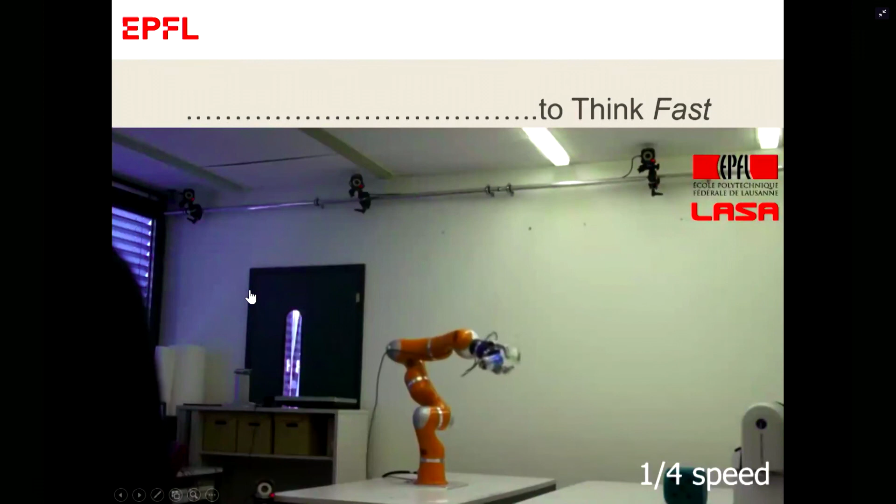So as I said in introduction, what I really wanted to talk about is the type of work that we do on learning controllers that can act fast. And I always like to start with this example that maybe some of you know, where we have a robot that can catch objects in flight very, very rapidly. And so it's not so much the speed at which the robot moves, because if you pay careful attention, you'll see that the robot doesn't move that fast. It's the object that moves super fast. But what the robot has to do real quick is to adapt to the motion of the object.

And what is particularly difficult when you want to catch an object like this one is that you have to orient correctly to be aligned with the particular direction in which you want to catch the object. So here, you want to catch the bottle, so you have to align with the main axis of the bottle. And it becomes even more challenging when you want to catch this type of object, which are half-filled with liquid, because in this case, the issue is that you have a moment of inertia which is not constant.

As the bottle flies, the liquid is going to move slightly, and so it's going to imbalance the object, and so the dynamics is very difficult to predict. And it was already difficult before, but it's even more difficult here, and it will very much depend on how you throw the object in the first place. So in order to manage to catch objects like this, you basically really need to have control systems that are very adaptive, fundamentally adaptive, and they can adapt in milliseconds.

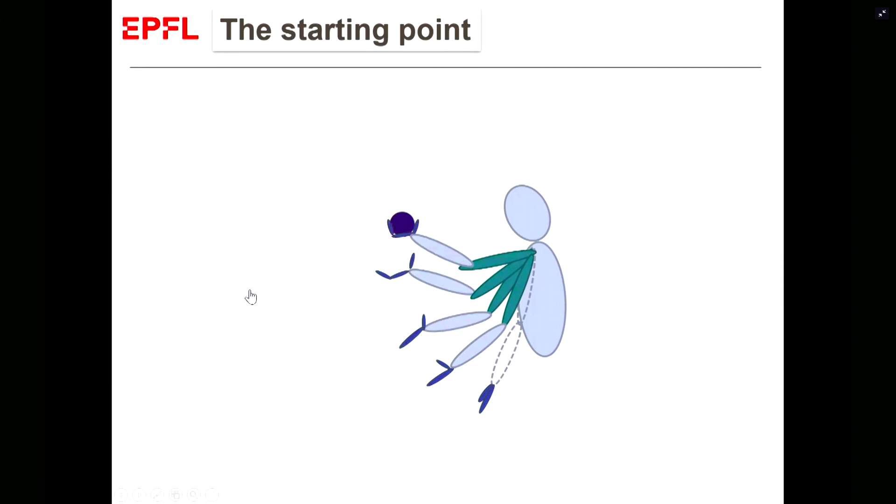So in order to explain how we get to that, I will start with the simplest example of all, which is just to put your hand on a ball. So imagine you have a robot that starts from a position A, and you want to put the robot's hand onto that object. So you're going to move the hand and eventually close on the object. And you have to compute a path. And you say, well, I can compute paths, but there are multiple of them. There are actually an infinite number of those paths. So which one should I choose has been a problem in robotics for decades, and we have many solutions. It totally depends on the objective function you choose.

You start from another initial condition, you have to solve again for this path, and again, you can use multiple ways of doing this, but each time you need to have an objective function and solve for that. So as opposed to solve with an objective function, send that to a solver and then wait until you get a solution, which may be quick or not, depending on the solver and the number of constraints, the ideal, what you'd like to have, is a closed form solution. By closed form, that means you have an analytical solution. Once you have an analytical solution, you don't have to plan anymore.

And if this analytical solution has some particular properties as the ones that are drawn here, such that it generates a flow of motion. They are illustrated here. Each of the gray lines represents a trajectory in state space. If you have a closed form representation of all those trajectories, then you just have to query your function to know how to move with it, and you can query it at each time step. And the best way to represent this is with what are called dynamical systems. And these are differential equations.

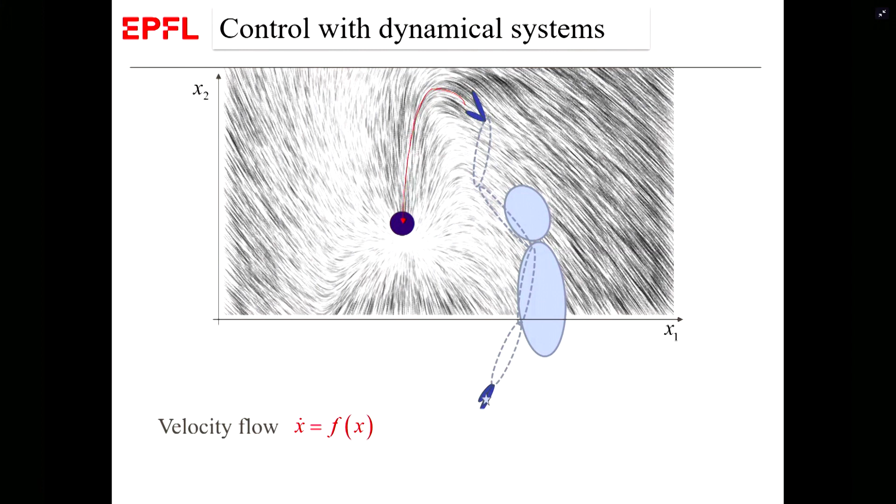Here I show a first order differential one. We often work with first order or second order. Here is velocity control, but you can also do it in acceleration. It's the exact same principle. So imagine that you have such a function. Here it is going to be f of x. This generates a set of velocity flows. And if your velocity flows are such that they are stable at where you want to go, then you are ensured that all the paths will eventually lead you to that object.

Now, you'll tell, okay, all of this is a static motion, so it's very easy, but what happens if the target moves, as I showed before? And there is a little trick that you can do with such a mathematical representation, is to say, look, I'm going to place the origin of my system onto the ball. And if I do that, then that means that as soon as the object moves, then my entire field moves with it. But if the field moves with it, that's fine, because that means that at every single position in state space, you still have one single trajectory feasible that brings you to the object.

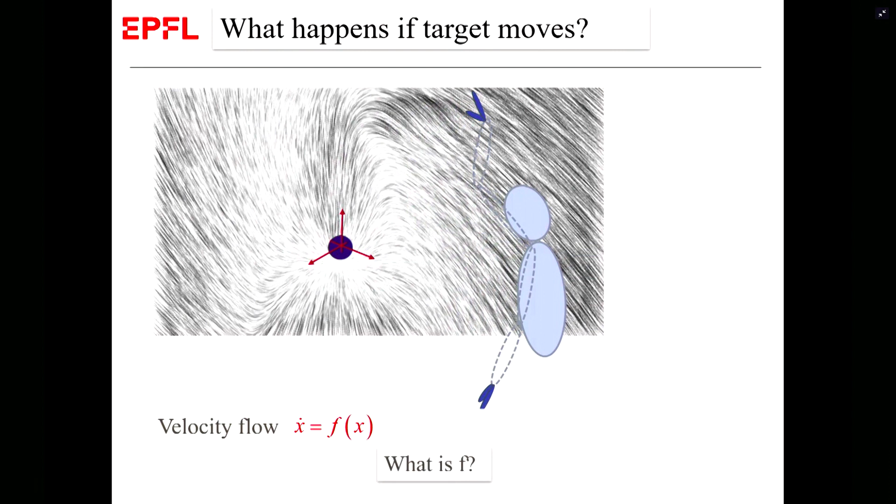And this is in closed form, so you just have to compute f of x at each time step, and it's not even time dependent. And so that gives you an enormous advantage because you don't have to plan, and you are guaranteed to have a feasible solution. Now the big question is, what is f? How can I infer f? There are many ways in which we can do that.

At the beginning, we used human demonstration, so we had a human showing to the robot how to do tasks, how to pick up objects. These will give you trajectories, examples of feasible trajectory. More recently, what we've done was to rather generate this trajectory with optimal control, solving for more complex constraints offline, and generate feasible path in space. Once we have that, then we can learn a function, and we can learn this in closed form.

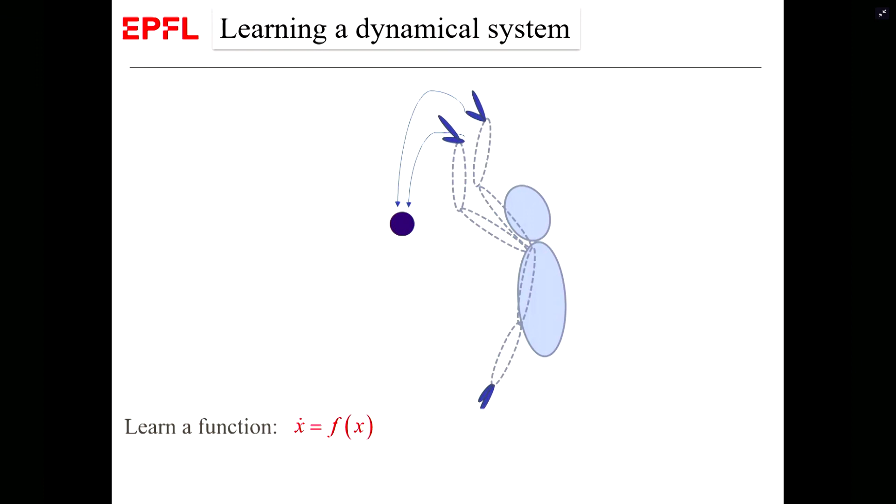So those of you who are familiar with machine learning, you know that there are many techniques that can learn that. It's actually a regression problem. So you want to predict the velocity, which in the particular drawing here will be two-dimensional, but if you're controlling for the hand of a robot, it will be at least three-dimensional, or maybe six, and if you're controlling for all the joints, it may be higher dimensional. But each of those dimensions, each of the velocity, can be estimated through regression.

Well, what you can do is say, okay, I want to explicitly have a convergence to a fixed point, which we can express as saying, okay, there is a point in space for which I want my function to vanish. And now the question is, how can I change the algorithm to learn with support vector machine or with neural networks so that I will stabilize at that point? That means you want to embed stability constraints inside the optimization of the machine learning technique. So to do that, you have to express constraints.

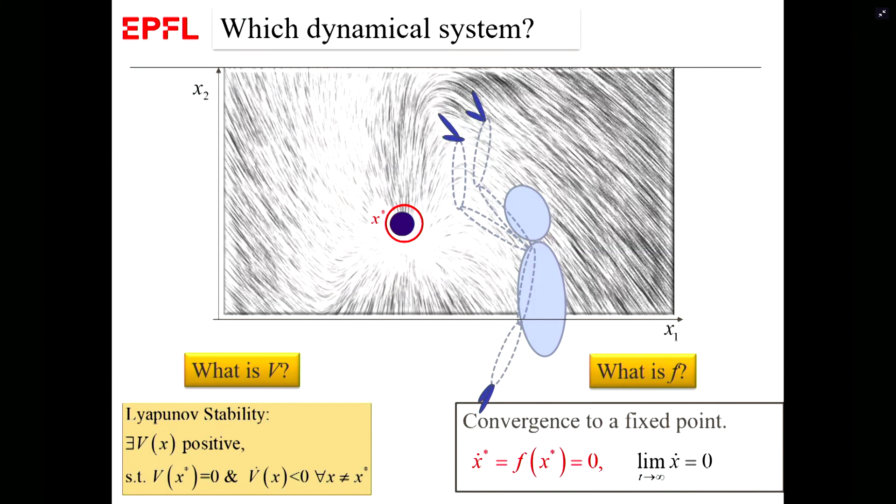And so in practice, we've looked at many different ways in which we can address that. I will not go through all of them. I'll just give a glimpse of two of them. So one very first approach that we took was to say, if we observe one particular approach in machine learning to represent such a problem, which is through a probabilistic model where you learn a full density between the distribution of velocity and the distribution of state, when I'm looking for a model like this, what I end up with is a set of Gauss functions, which we see here overlaid, and so it's a slice on each of those Gauss functions, and we have a mixture of those.

If we want to predict the velocity from this mixture, we can do it in closed form. We can take the expectation over the conditional of this full density, conditioning the velocity on the state. And we get a linear combination. So observe, first of all, that it's linear, which is nice. And it's a linear combination of linear systems.

The AK X plus BK: X is the state, AK are a set of matrices, BK are a set of vectors. This is very easy to compute. And the HK functions are actually just normalization functions between 0 and 1. So this is a closed form solution, and it has open parameters that are linear.

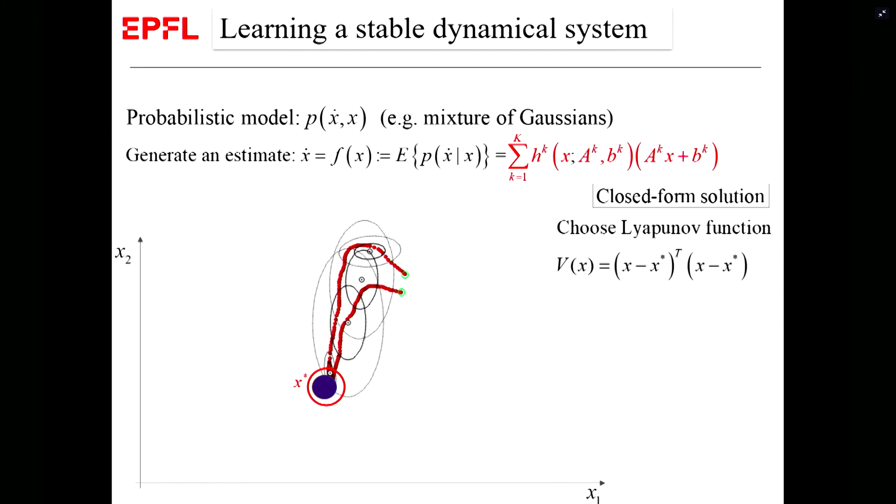Now you can set constraints to force stability, and you can derive them here by choosing the simplest Lyapunov function ever, which is a quadratic cost to the point that you want to reach. And you can infer then constraints on these open parameters, the BK and the AK. And you can enforce that basically the energy decreases.

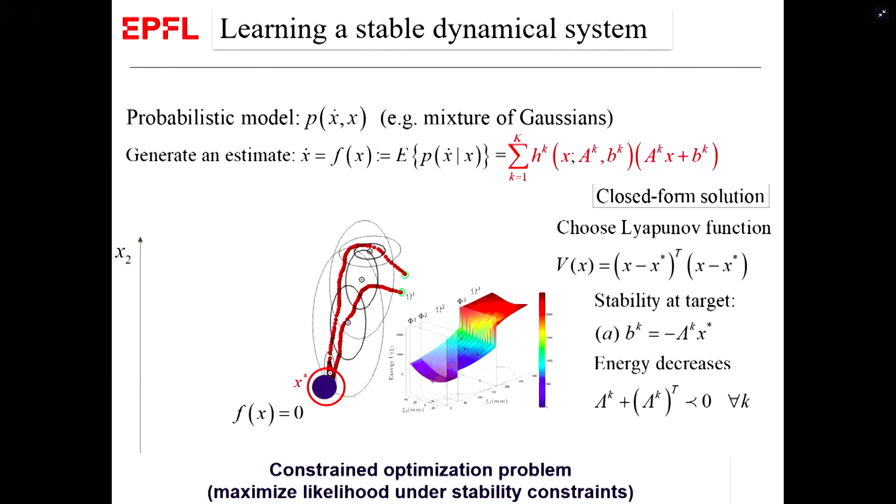So you can write this, and you go back now to the optimization for this particular model, which is a mixture of Gaussians. It's a constrained optimization problem where you maximize the likelihood or you minimize the mean square error under now a certain number of constraints, among which the stability constraint. You do that, then you get exactly what you want.

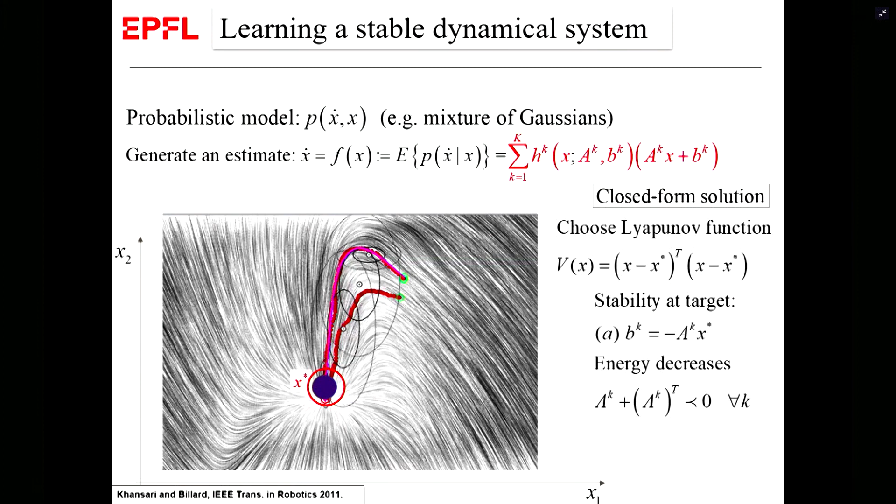You get a flow, observe here, you get a flow as we've seen before. You have a very tight match to the actual demonstration, but you also have a guarantee that you stop. And observe also that there is a nice generalization at the bottom where the system generalizes to converge to that position. Now, this was one approach.

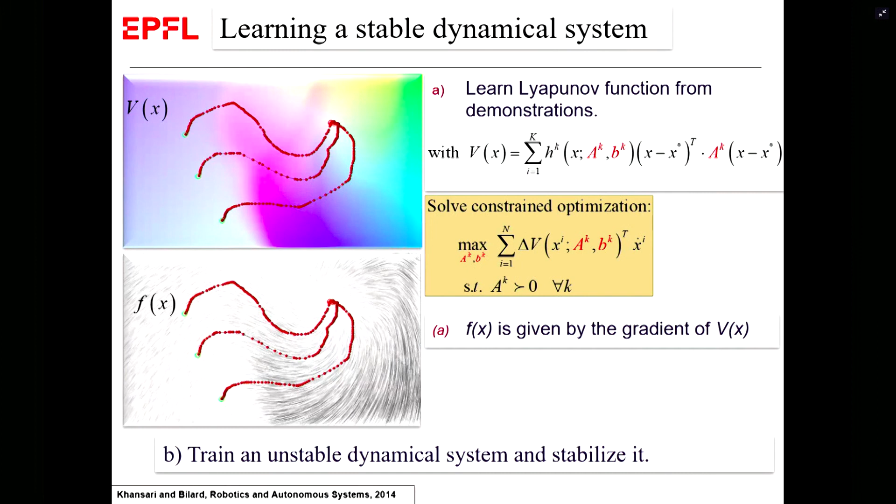We then looked at other approaches where we relaxed the fact that we're using such a conservative Lyapunov function. We looked at non-conservative functions, where we directly learn the Lyapunov function and then derive f from the gradient of V. We also showed that we could train unstable dynamical systems, learned, for instance, from neural networks or any other approach, and then stabilize them with this approach. And if we don't have demonstrations, we can also do it with reinforcement learning, which we have shown in this particular paper. I will not go into detail.

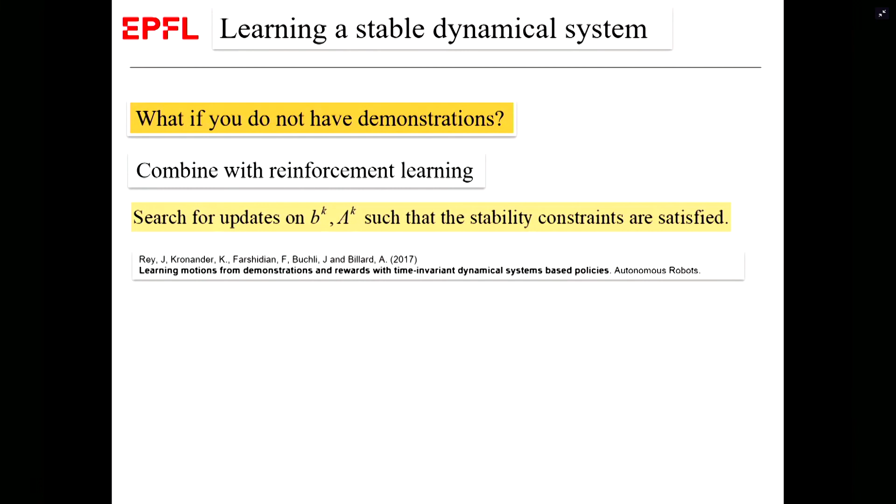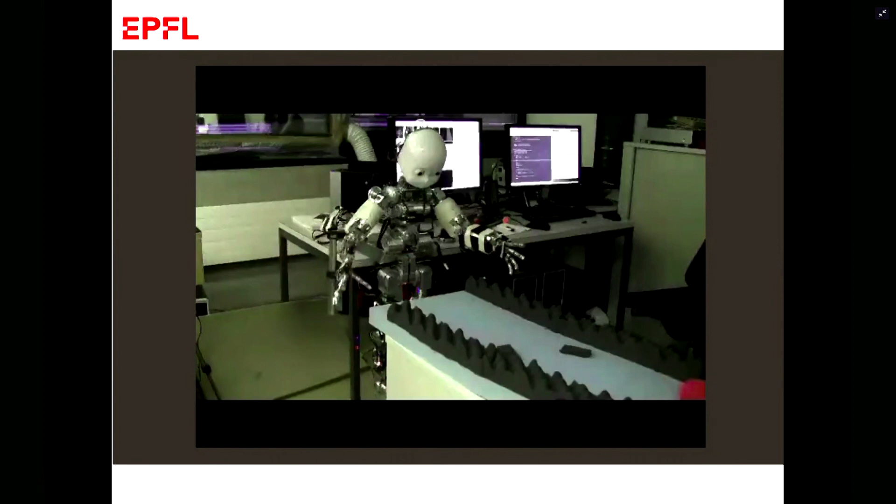So once you have such a system, here is a little demo of what you can do. If you have a ball and you want to reach it, and you know that you will converge to it, even if you generate disturbances on the way as the ball goes down that slope, you will be able to catch it. So you'll see that we're going to generate disturbances. We're either going to lift the slope as it goes, or we've placed obstacles on the way,

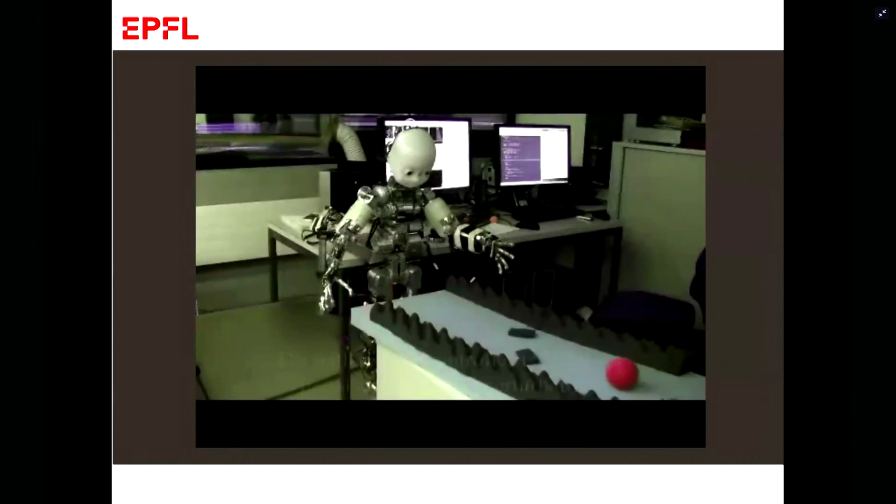and this generates really unexpected disturbances. So this is a flow without disturbance, this is a flow with disturbance, and observe how the robot is closing the hands nicely, adapting to the motion of the ball, adapting to the different disturbances on the fly and in a few milliseconds to meet the object on time. I like to emphasize that we meet it on time, but there is no time computation.

It's implicit. It's implicit in the fact that you're correlated with the state of the object, which is the origin of the system. So as the state of the object is coming closer to you, the origin is coming closer to you, so you do accelerate naturally to meet the object. And that's how you meet the object on time.

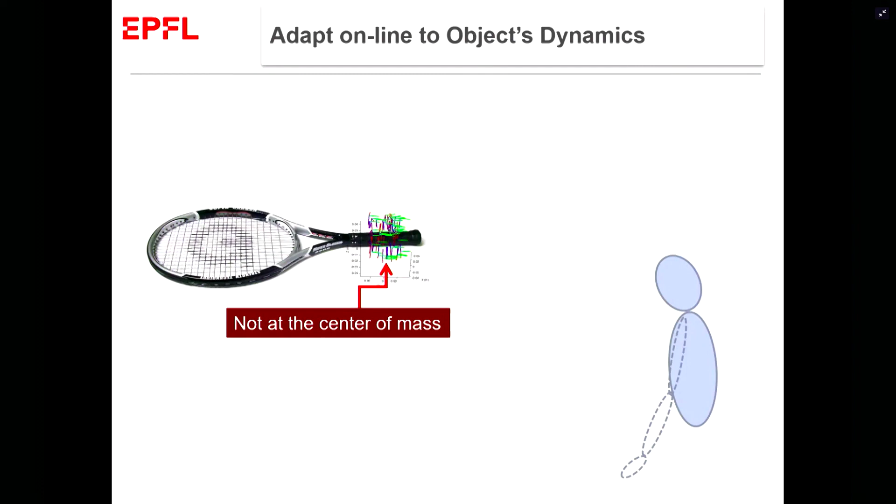Now, how do we get from there to being able to catch flying objects? What we need, in addition to what we've described so far, is to be able to predict the dynamics of the object. As I mentioned in the introduction, if you have a complex object flying, one problem is that the flying dynamics is very nonlinear. And here is a nice example.

If you want to catch, whether it's a bottle or this particular tennis racket, what happens is that the grasping point, the point where you want to catch it, is not moving with a ballistic motion. It's actually rotating and moving backwards and then coming back to you and backwards, etc. And the particular dynamics completely depends on how you initialize the motion.

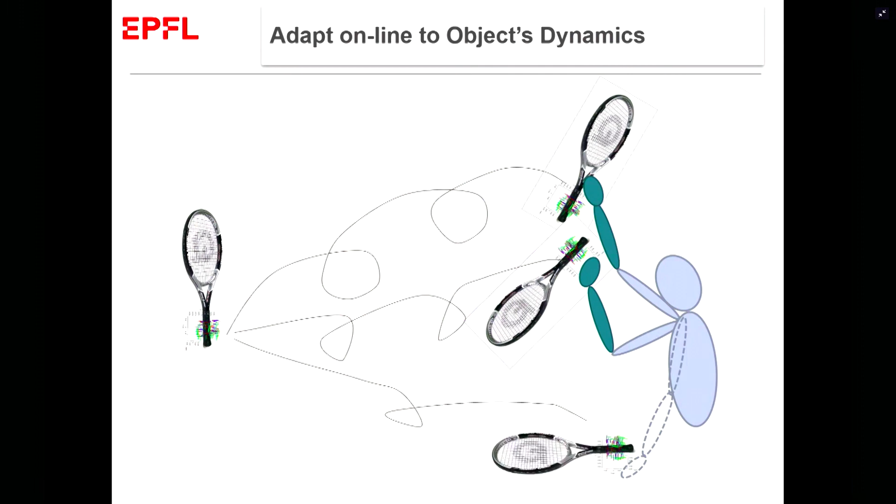And typically, if you change the translational velocity to start with, then you're going to get very different dynamics. So we can learn these dynamics from few examples. We showed that we could do that with many different techniques.

We contrasted many different machine learning models. The best in this particular example for us was support vector regression. So it learned a model that is described here, which is predicting now the translational and rotational acceleration as a function of the position and velocity of the object.

On its own, it's not sufficient to have this model because, of course, there is noise as you go, so you can combine this with an extended Kalman filter, and you treat the model that has been learned by support vector regression here as the model for the extended Kalman filter. Since you have a closed form solution, you can compute a derivative and feed that to the Kalman filter. And so once you have this, you just have to combine the two systems.

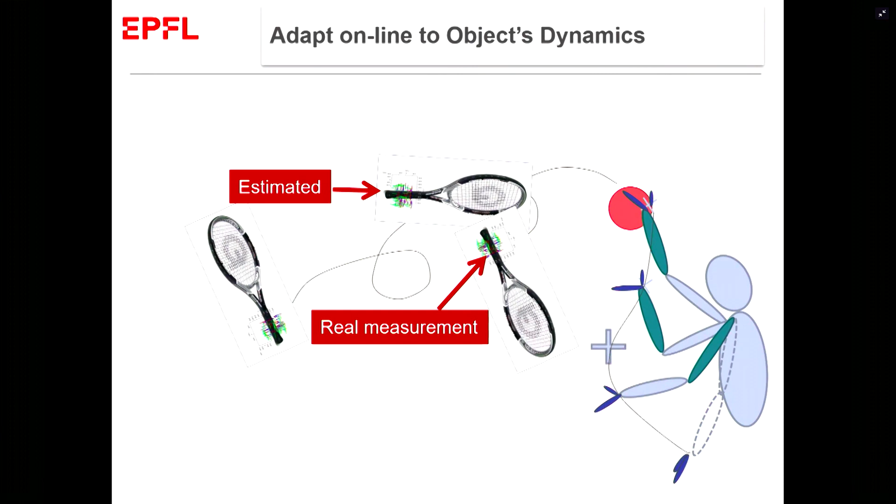So at runtime, you keep tracking your object, which we do with cameras that we have in the room, on the ceiling. We estimate where the object is. We continuously predict the trajectory of the object. We predict where we want to meet the object. But if suddenly, as we make a new measurement, this measurement departs significantly from the estimated one, we recompute a new point where to meet the object. And then we immediately use this adaptation of our dynamical system to control the hand to meet the object at the new location.

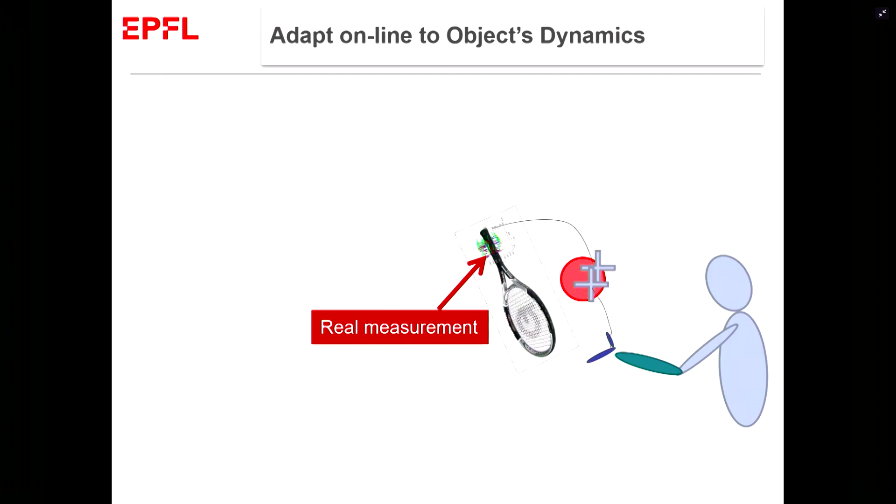Now, I described all of this in pure Cartesian space as if I was doing only translation, but the same is done in orientation. So we do orient the hand to align with the object direction, and this is done by coupling the two dynamical systems, one for orientation and one for position. I don't have the time to explain this, but this is documented in the associated publication.

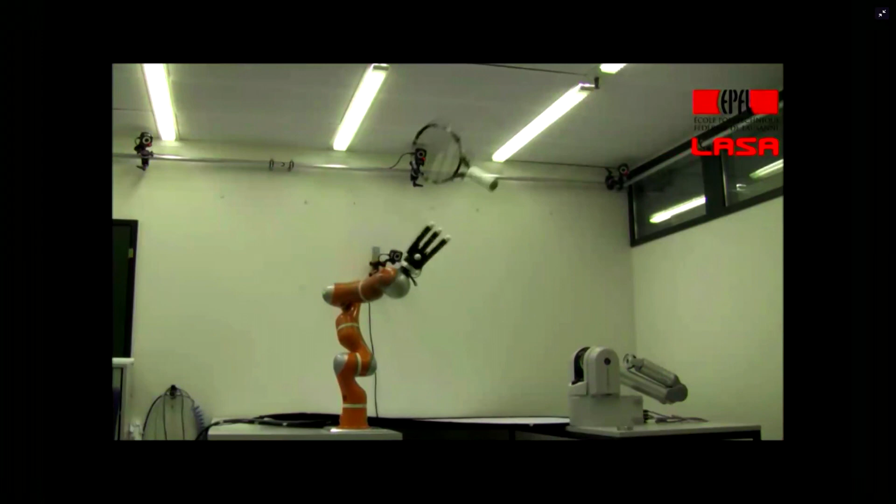Now, this gives us very nice demos like this one where you can catch the object in flight and you have fairly good performances. They're really good given the complexity of the task, but the performances are not perfect. It's about 60% performance when we did the systematic test. Now, you may ask, why do we incur failure? And one reason for the failure is the following.

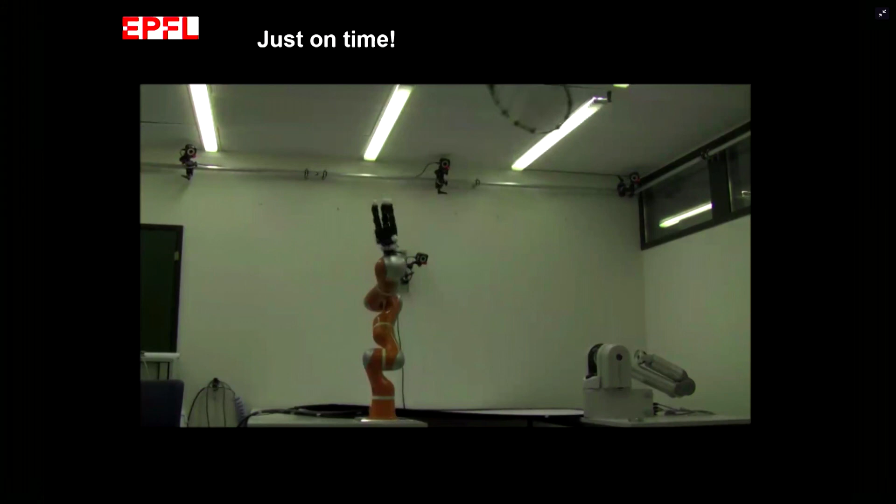Sometimes you just barely catch it. These are a few examples where you really barely make it. And you see especially the difficulty is to catch the object in the hand and to hold it within the fingers of the hand. There are a couple of failures. There were quite a lot of failures actually among this 40% that were due to what you're seeing here.

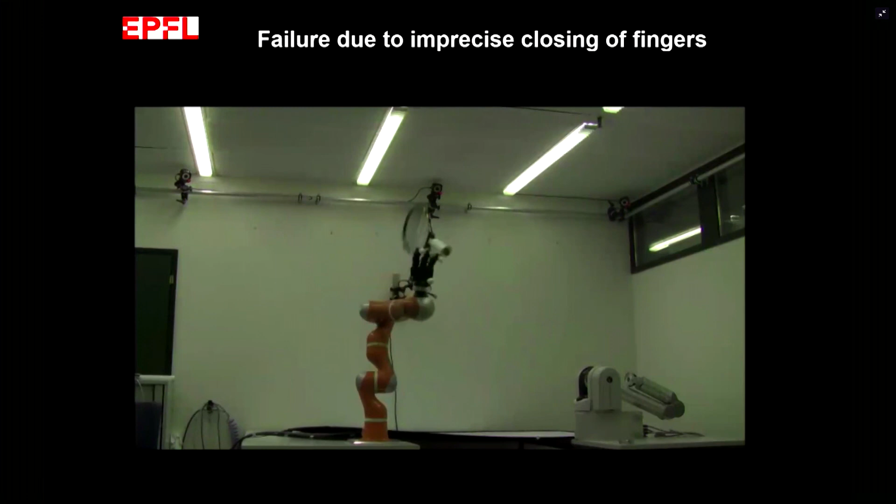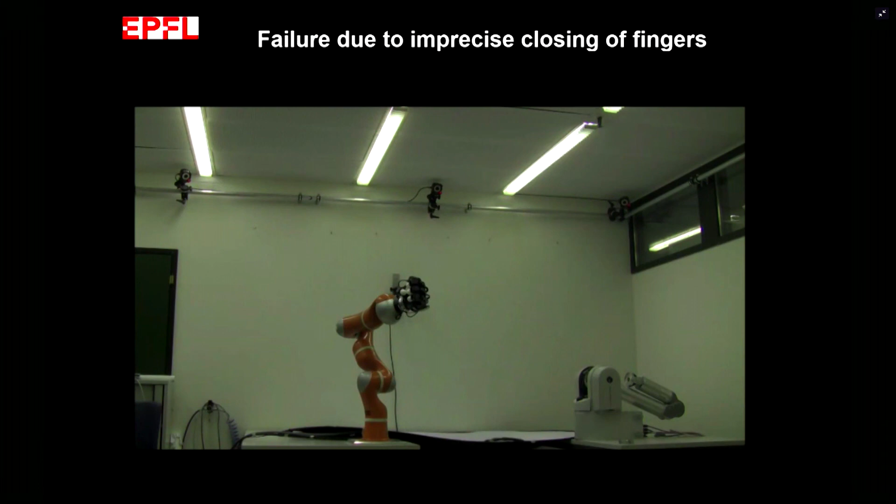If you observe it, what happens is that the racket bounces before you close. So you actually meet the object, but you don't have the time to close your fingers on it. And this is not just because you're trying to catch such a complex object as a racket. It actually happens also when you're trying to catch just a ball like this. So the reason for that is a hardware problem. It's just that your hand is not closing fast enough.

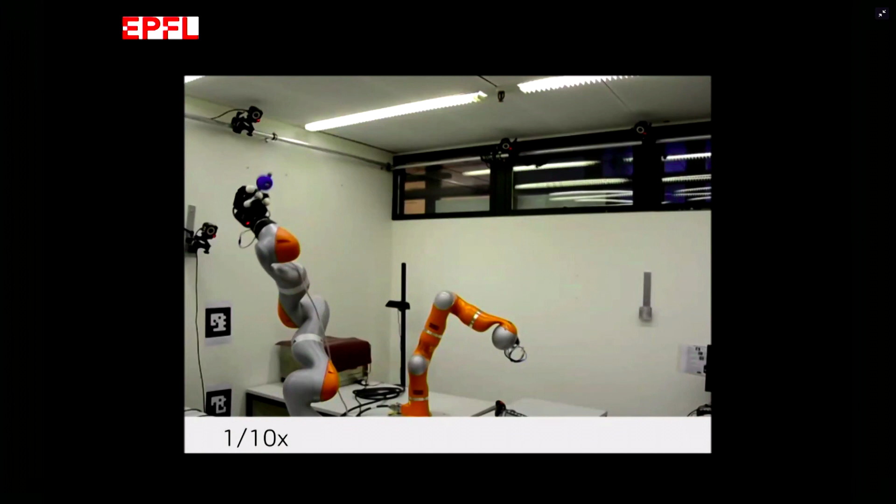So we could have stopped at that, just bought better hardware and moved on. But we thought it was an opportunity to also design a smarter controller. Because as surprising as this may appear, humans are actually quite good at catching balls, and they're not as quick as robots. So we were interested to understand why humans are so good, and we got some insight into that thanks to a collaboration we had with Andrea d'Avella, who's a professor in Rome, and he was studying catching in humans. And he observed that when people catch, they actually don't stop when the ball is getting into the hand.

They are moving like this. They are moving a little bit in orbit with the object. And this is really smart because it has many advantages. One is that you can slow down the object as you move, but not directly stop it. So you don't have this bouncing effect. Second is that you still have a bit of time to adjust the position of your fingers and possibly also the orientation of your wrist.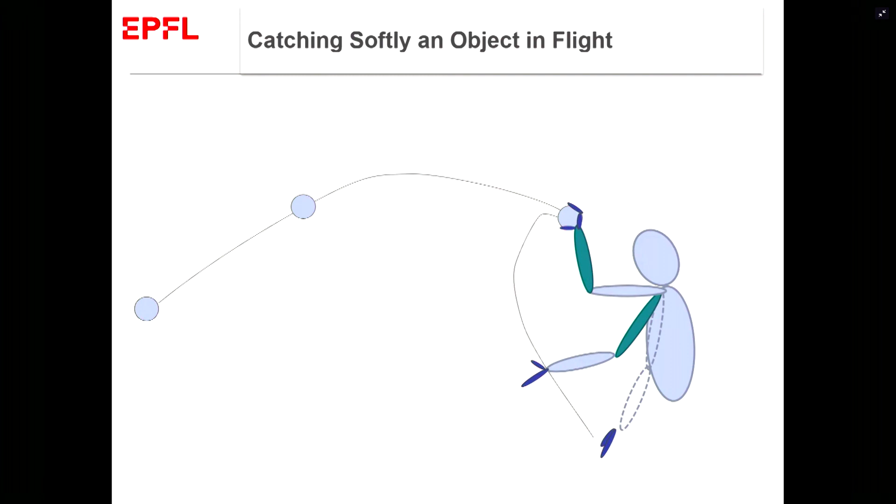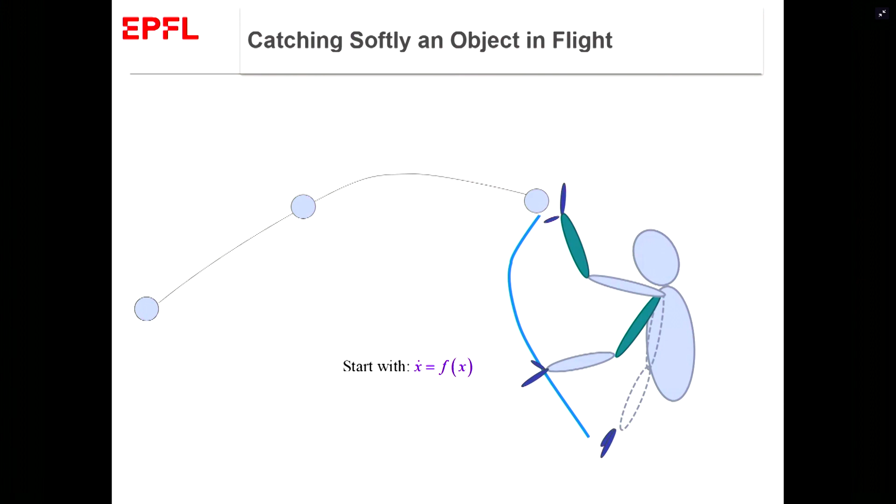So we thought, okay, can we do the same with our algorithm? And yes, it's fairly easy to do it. So you start with the dynamical system as I presented before. You start with a function that reaches eventually to the object, asymptotically stable at this. But as opposed to stopping at the object, you don't guarantee now stability at the object. What you want is actually to move with the object. So what you want now is to track the velocity of the object.

So your stability point is no longer in state space, but it's in velocity space. You want your motion of the hand to now stabilize at a certain velocity. And when I say a velocity, it's not just the amplitude, but it's also the orientation of the velocity of the object. So you start with an estimation of how the object is flying in the world, and now you're using this estimate to align the velocity of your hand once you are within the orbit or within the trajectory of the object to move with it, to continue moving.

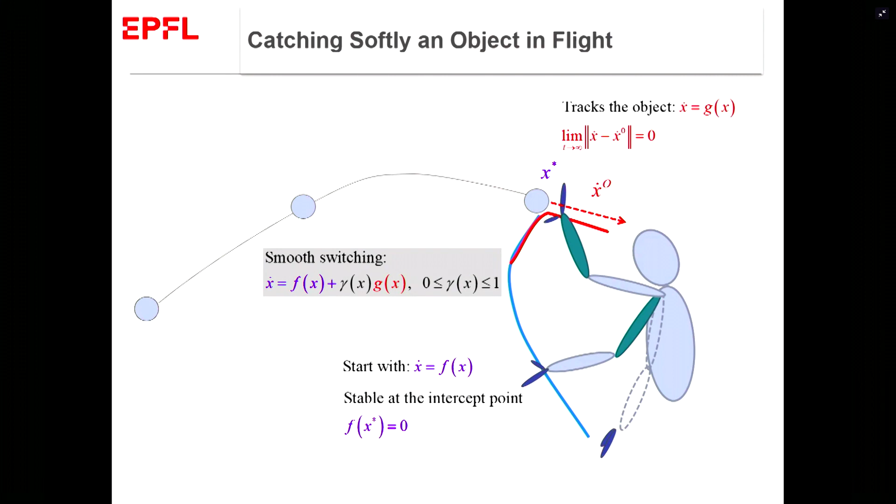And you can do this by simply switching between two stable dynamical systems. One is stable in state space, that means it moves as fast as possible to meet the object in flight. And the second is aligning the velocity as fast as possible to the velocity of the object. So this was shown in the exhibit at the KUKA Award. It was used by many different people. Success rate is close to 100%. Such a simple strategy, really based on human ways of doing things, buys you a lot more than buying a better hardware.

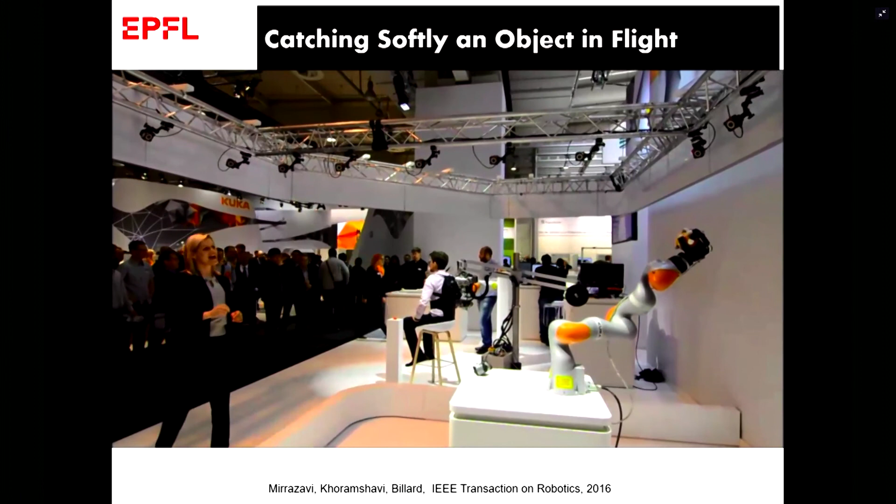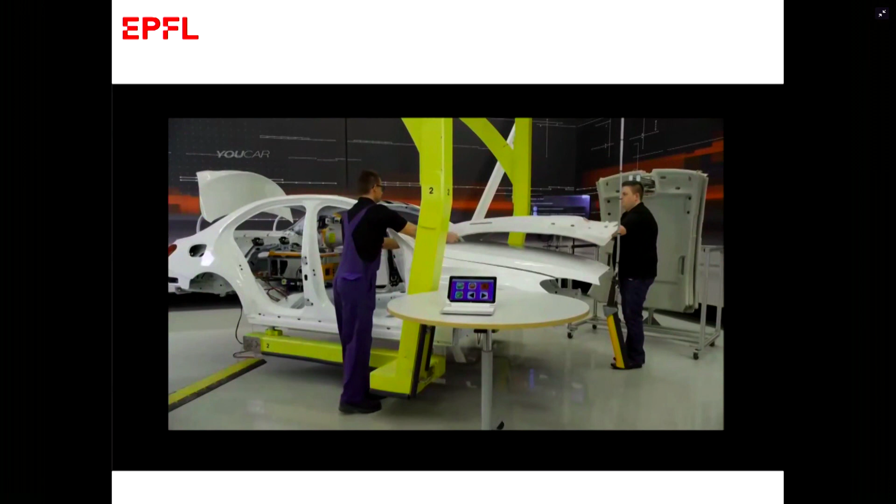So I'll move on to the next step. We exploit a lot of the notion of coupling across dynamical systems, and we thought one way to do so would be now to start coordinating multi-arm systems. Why? Because as you see in this video, we often do multi-arm manipulation in real life and also in the industry. So since we are able to control very rapidly for one robotic arm, can we do the same for two robotic arms, and can we further make sure that these robotic arms move in synchrony and adapt in synchrony? That's the most important part.

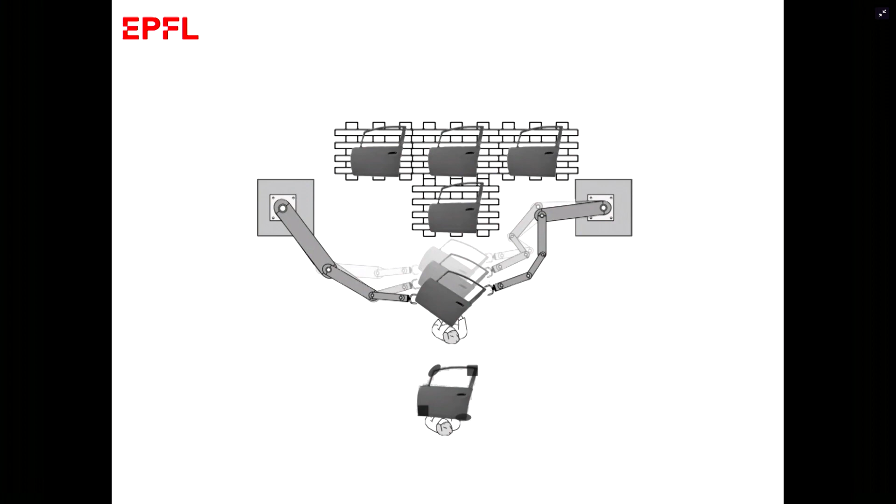So our task now is to coordinate two robot arms to catch an object moving, as we've done before, but the difficulty increases now because we have two arms and they need to meet this object simultaneously. So we must track the object as we've seen before. We must control for simultaneous motion of the two arms for simultaneous grasping at the same time. And we need to be able to enforce that we have robustness if there are disturbances on the way such that the object is moving. So we have trajectory of the object as before.

What we can always assume is that we have an explicit expression for the robot's workspace, and there are many different ways of having this. We usually learn that. I will not explain here how we do that. There are ways in which you can explicitly learn the feasible workspace of the two robots. And further, you can then use this workspace to determine the grasping point, or the point where you will be able to meet the object in such a way that it's feasible for both robots. This is going to be the intercept point.

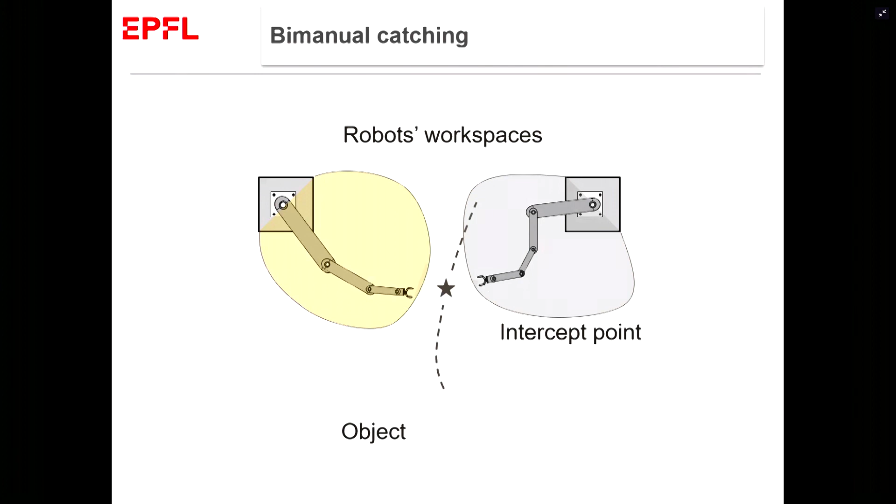Now, how can you synchronize the two robot arms? Well, you can do that with this notion of virtual object that I illustrate here. Imagine that you have an object which is already linking the two robot arms, and that this object is now asymptotically stable to the trajectory of the real object. So this object is flying virtually towards the real object. But because the two robot arms are linked to this virtual object, this virtual object is bringing the two arms to the object that you want to intercept.

So this notion of virtual object, if you want, is like a virtual constraint that forces the two arms to move together. And the fact that this virtual object is now anchored onto the real object allows you to enforce that you will have a simultaneous coordination that asymptotically reaches the desired object.

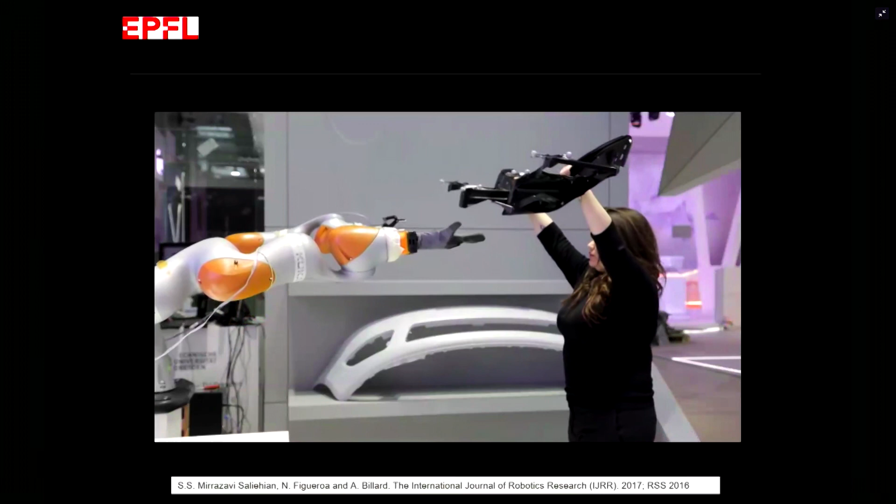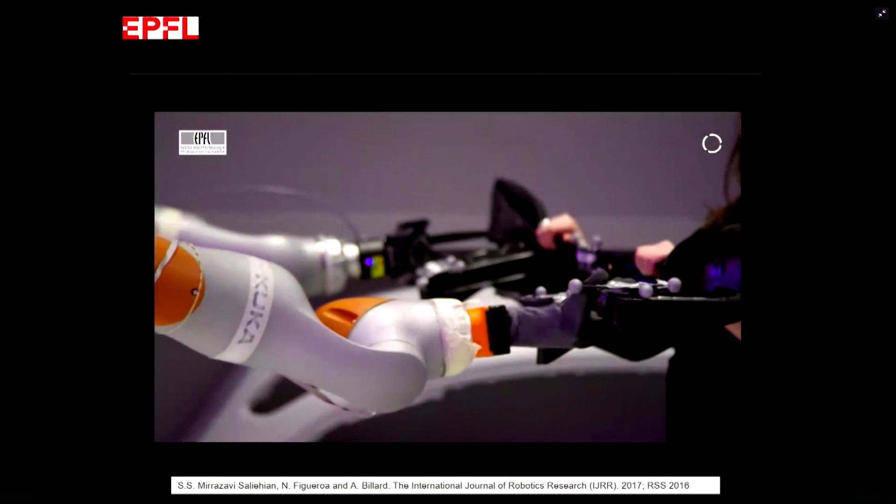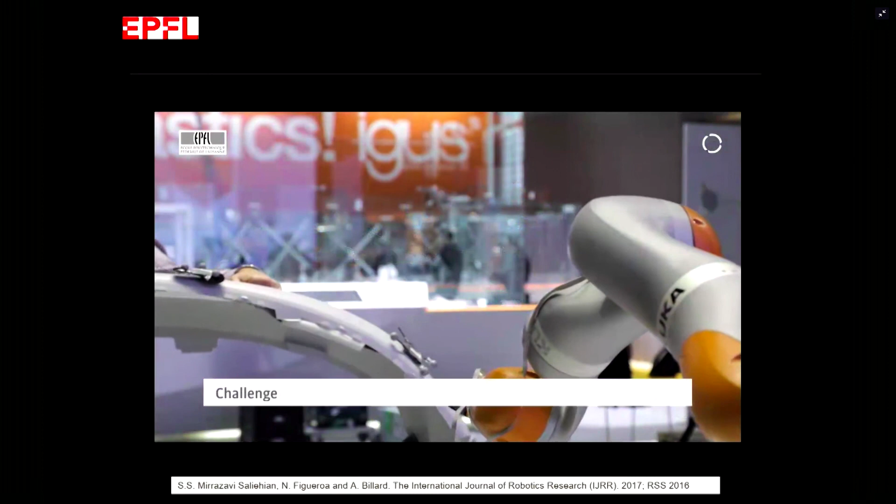So here is a slowed-down video of how this can be used to do what I demonstrated at the beginning, which is to catch an object that is given to a pair of arms by a human. You've seen Nadia Figueroa, and here is Sina Mirrazavi, both of whom developed this system. This was demonstrated also at the KUKA Innovation Awards, with many different people trying the system in and out, and it's very robust and very stable. All of this is done in slow motion. So of course, in slow motion, everything is easier.

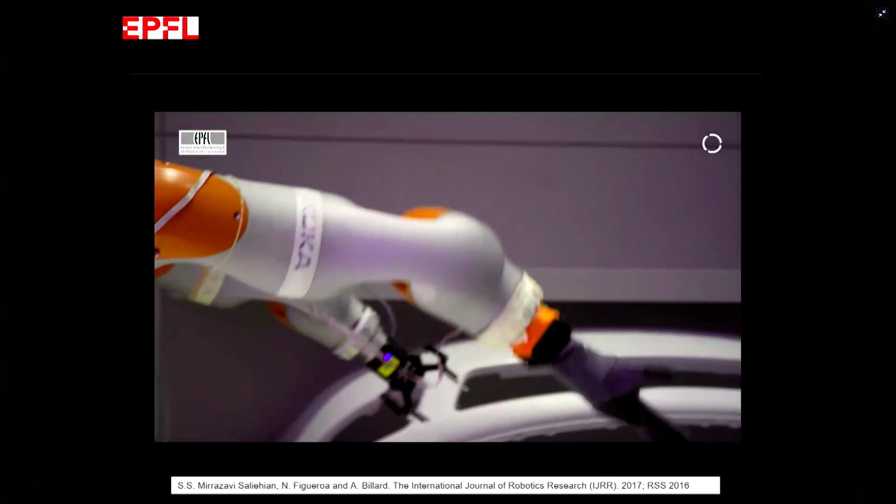Our goal in the lab is to show that our algorithms, because they are computed in closed form, can compute things very rapidly. So we went and made a demo of this very fast ability to catch things in flight. And here is the demo. There are a couple of these.

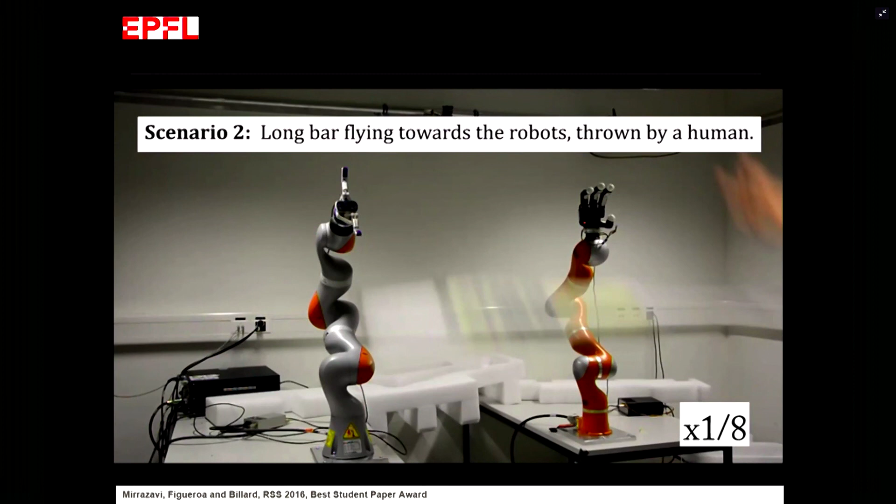You can see a few movies of that on our website. Here what we are doing is that we are flying a flexible bar. And we are sending this flexible bar to this pair of robots, and they have to catch it in real time. So why a flexible bar? Because it's interesting, because it's flexible.

They do meet their respective grasping point on the two ends of the bar, but they travel with a completely different path. Sometimes one will go up and the other one will go down, and conversely. Nothing is prescribed for starter because it totally depends on how you're sending the bar. And this is the adaptation that you have, which is completely dependent on this dynamical system.

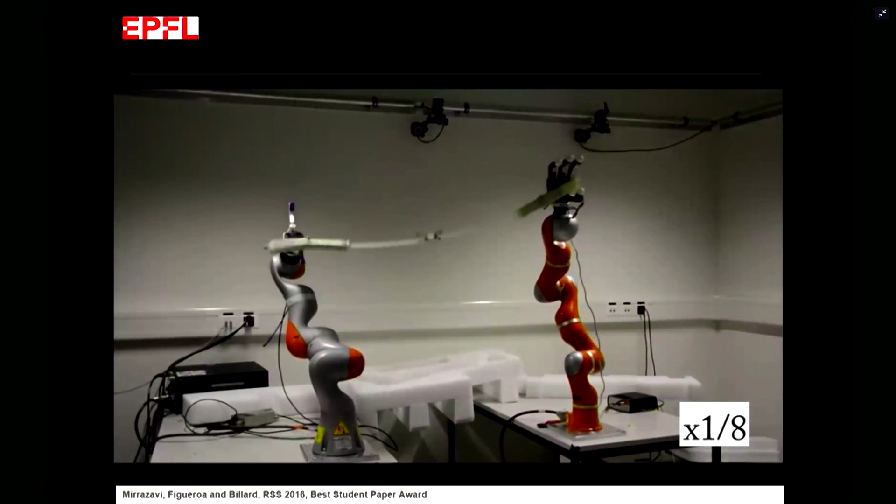Each of the robots has this virtual grasping point, and it's led to this virtual grasping point through these virtual objects that forces the two robots to move simultaneously. And the anchor on this virtual object, and the fact the virtual object is also tracking the bar, speeds up or slows down the two robot arms and forces them to move at the same speed as the object.

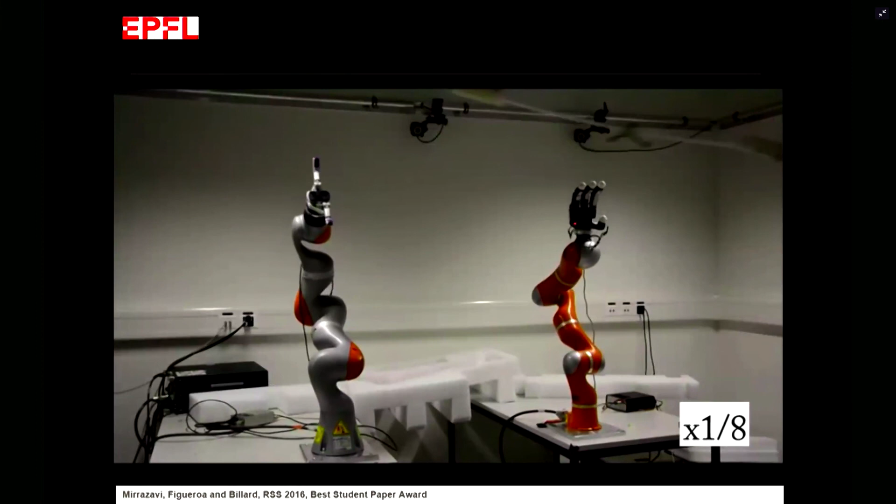Observe also that all of our videos are slowed down, they're not accelerated, and they're slowed down for you to be able to appreciate this motion of the object and the motion of the robot. They're slowed down here 8 times.

We absolutely wanted to port that to a humanoid robot, to have the humanoid robot catching objects in flight. So this was the work done by Sung-Soo Kim during his PhD. He was also the main person who started this work early on for catching objects in flight. It was a hammer at the time and not a racket, and then he moved to the racket.

Now I'll tell you whether we were successful or not. Problem is that the humanoid is slow, so we haven't been able to really do that as fast as you've seen before, but I believe that we had the technology for this. We just miss a platform which is fast enough.

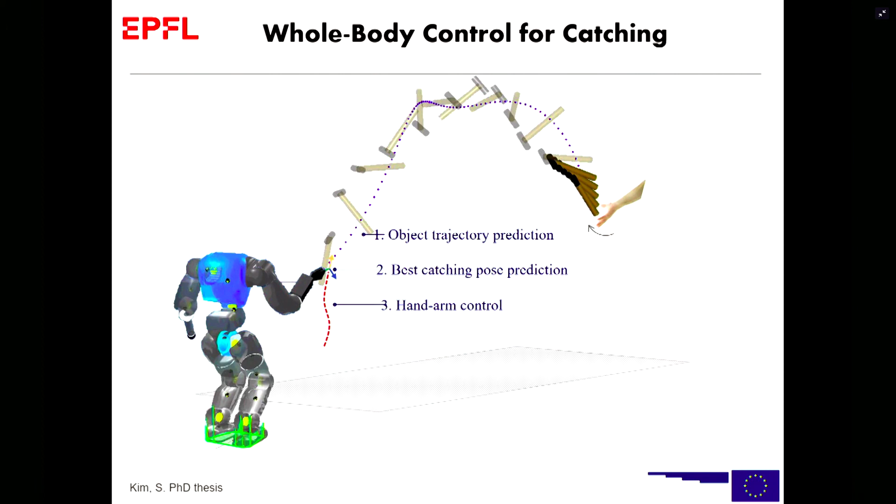So what Sung-Soo developed was to use the object trajectory prediction that we had before, to compute the best catching pose prediction that we had before, and then for the arm hand control, a little bit the same as what you have for a single arm, but added to that to be able to learn a stability region for the lower body control. Because when you want a robot to catch an object in flight, and it's a humanoid robot, the additional difficulty is to stabilize the center of mass as you do so.

So I will not go into the detail. If you're interested, it's in the thesis. But basically what he did was to learn now a feasible dynamics for the center of mass. And he represented that by a dynamical system. He represented the fact that the center of mass needs not to move further away from a certain region.

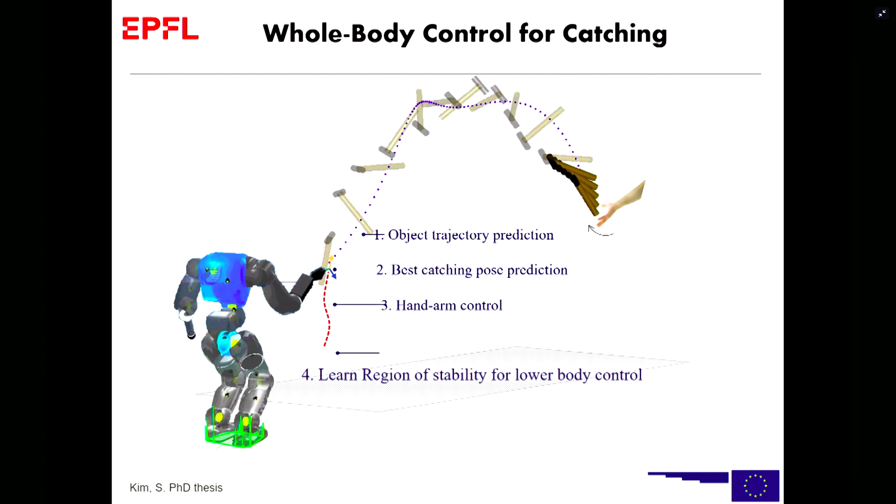And the center of mass is moving with a dynamics which is coupled to the dynamics of the arm being coupled to the dynamics of the object. And so this triple coupling allows you to catch things on time. Now, these are the simple videos that we have where the robots can adapt the motion and still remain stable within its polygon of stability, and still meet the object in flight.

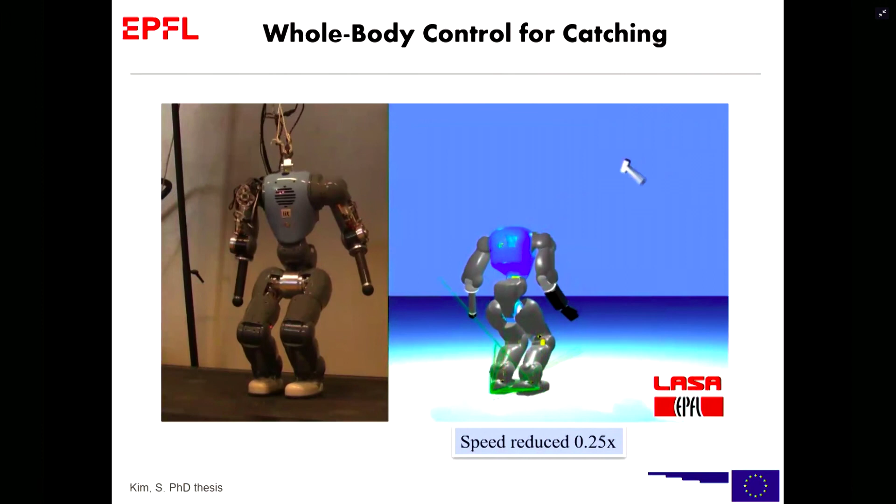On the left-hand side, all what you have is a mock-up of that with a robot. We couldn't do that with a real object because an object will fly much faster than the robot does move in reality.

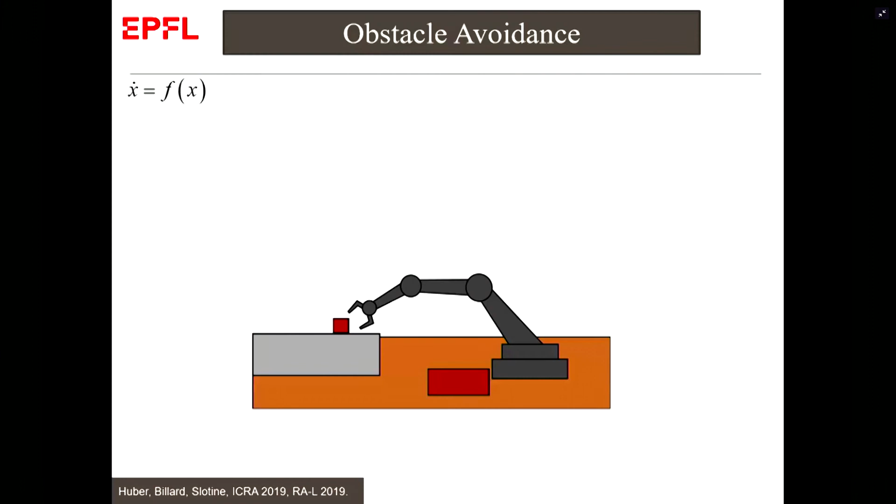If I have a bit more time, I would like to quickly present some work that we have done on extending this for obstacle avoidance. So of course, it's interesting to do this motion in real time if we can also avoid obstacles. There is a very neat way to do so, still using the same dynamical system approach.

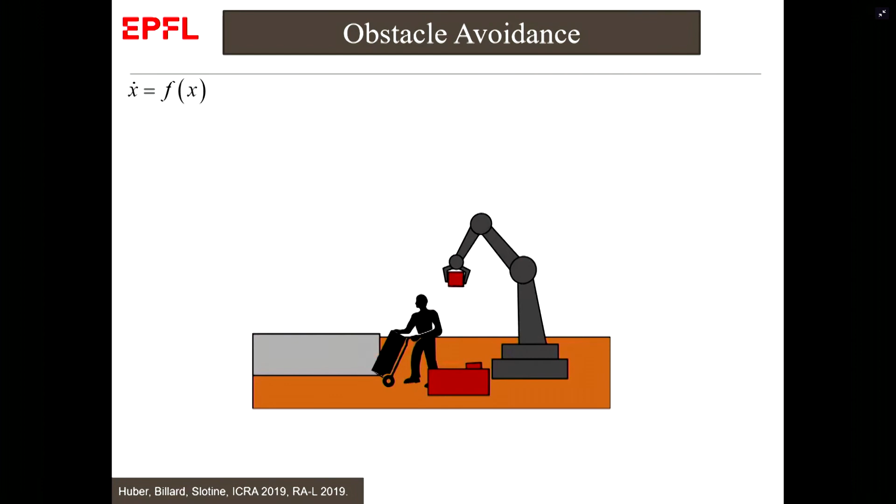So think of this function x dot equal f of x, which drives our system to go from one place to the next. We can now add a modulation from the obstacle, which is a simple multiplication M of x times f of x. So what is M of x? M of x is a matrix that will modulate the original flow of f of x in such a way that it will prevent it from penetrating the obstacle.

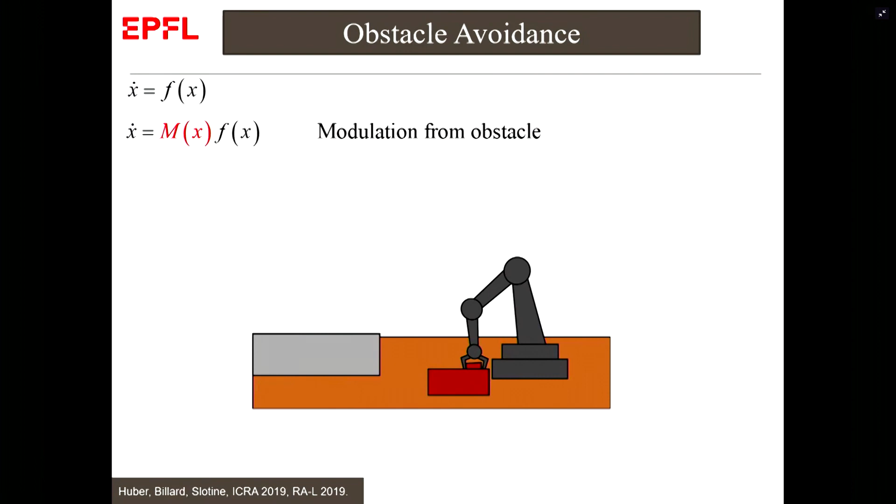So let me represent how we can do that. Imagine that you have an obstacle like here, and you have an explicit expression for the obstacle boundary. You know the shape of the object, and this expression for the shape of the object is given by a function that you have in closed form, gamma of x. You can learn it with machine learning techniques. There are many ways in which you can learn that. For those of you familiar with GP, Gaussian process, it's one approach that has been used extensively to model the surface of objects. So you have this function.

You can construct your M of x by eigenvalue composition as opposed to decomposition. You write here the eigenvectors into a matrix E, the eigenvalues into another matrix D, and you construct these eigenvectors by knowing the normal and the tangential to the surface that you have computed, the gamma of x. Then you can modulate the deflection by modulating the eigenvalues. So I'll illustrate that with a simple example.

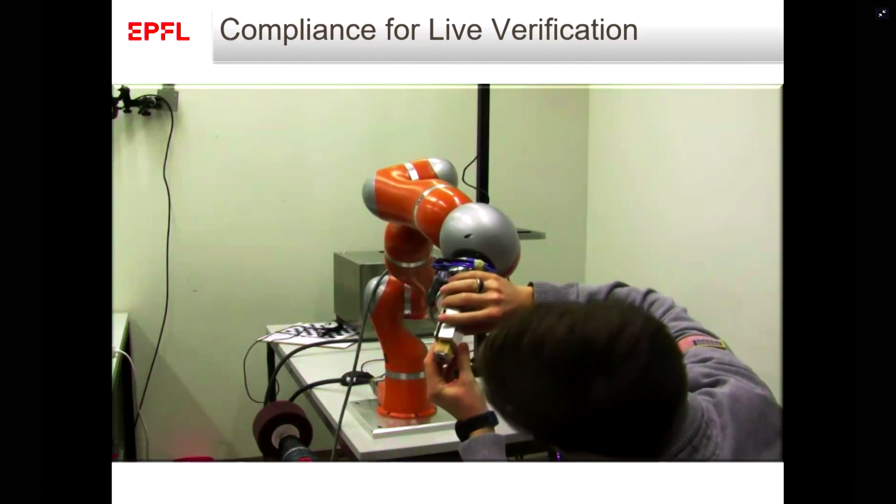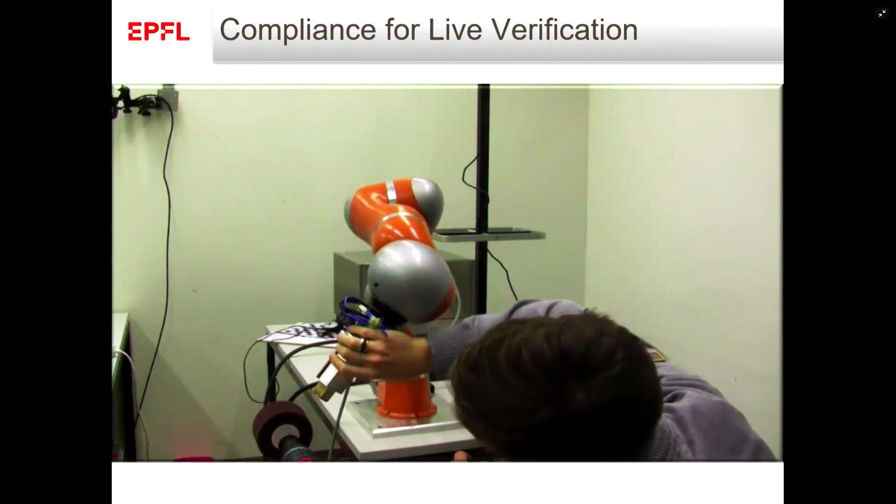The last thing that I would like to mention briefly is that this dynamical system control allows you to control in Cartesian space, in velocity space, in kinematics, but it also allows you to control in force. And we've done quite some work recently on using it for force control. So before I move to force control, I'd like to mention first that we exploit extensively the notion of compliant control that we inherit from platforms such as this one, where the arm here can be moved and remain compliant. So we can exploit this compliance to move the robot at runtime.

Oops, doesn't seem to stop. Okay, I'll have to go back. The video is not starting.

So we use the compliance to drive the system. As we show the robot what we want it to do, it recognizes that it's a linear polish, and it runs with the linear polish, for instance. Then this frees the human, who can do something different. When the human wants to control whatever the robot is doing, they can stop it using this notion of compliance, and then push the robot to do something else. This can be recognized as a new dynamical system.

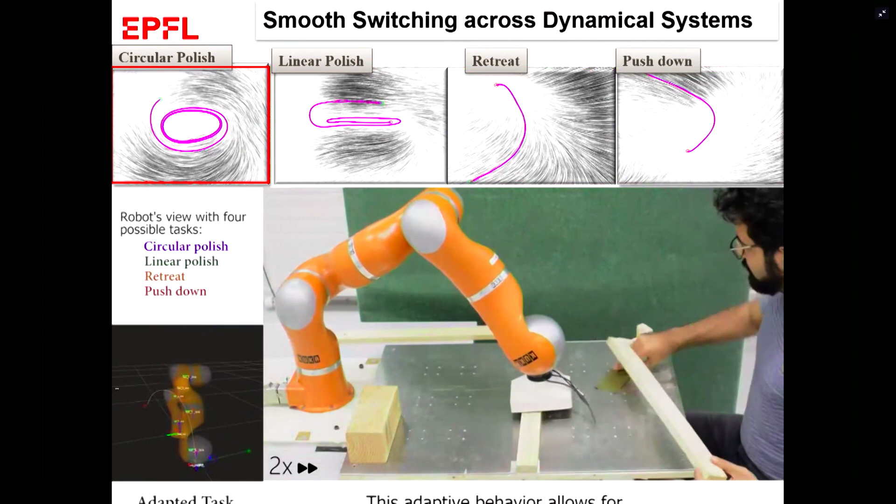And you can switch across linear polish, retreating to a 0 position, going back down, push down, or doing circular polish and many different actions like this. So you can have a set of these actions, but these are purely kinematic. So in order to use this action to now be able to control in force, what we did was to extend the dynamical system by explicitly controlling one part of the dynamics in the normal direction against the surface with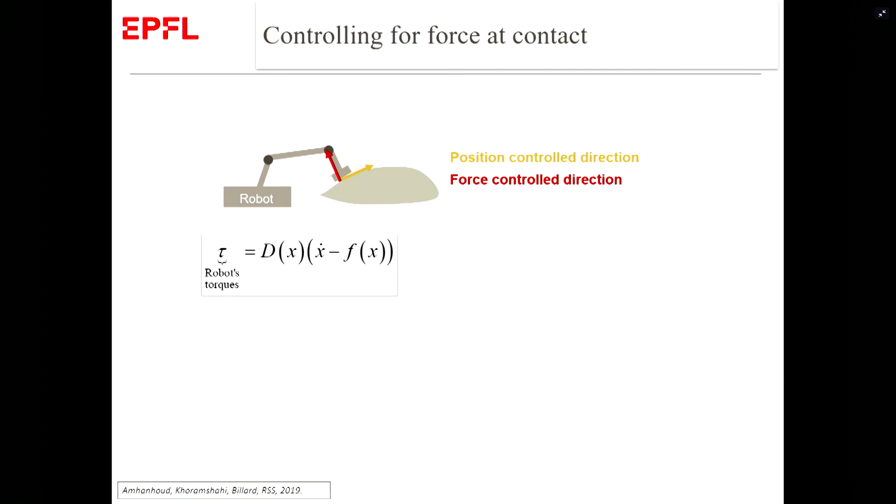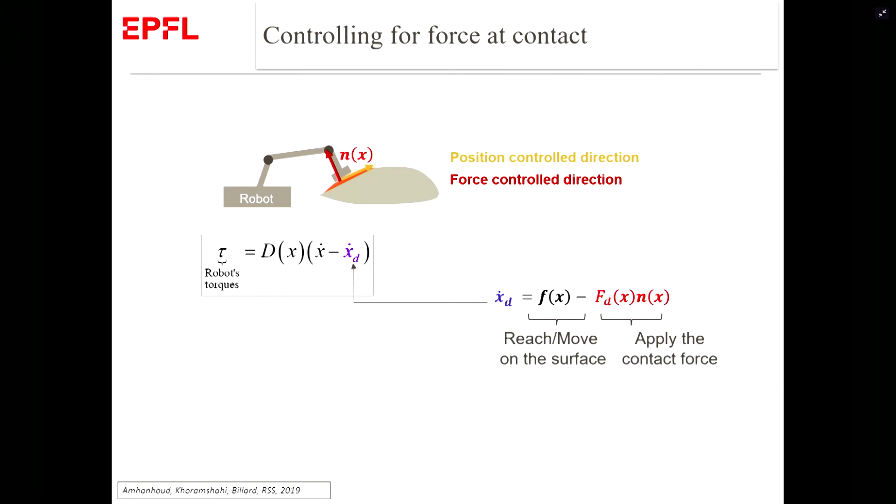the dynamical system. In other words, we are decomposing the flow of our motion now between a purely kinematic motion, sliding along the surface of an object, for instance, that's reaching, moving to the surface, and then a secondary component still composed of the dynamical system, which will apply the force.

Now, once we have such a system, we can use the coupling across the system for 2 arms and get what you're seeing here: a pair of robots that can support an object, apply the force that you need to apply to support the weight of the object. They remain compliant, but this compliance is inherited from the dynamical system. It's the coupling between the 2 arms. It's a coupling in orientation and position, which allows them to stay oriented with respect to each other.

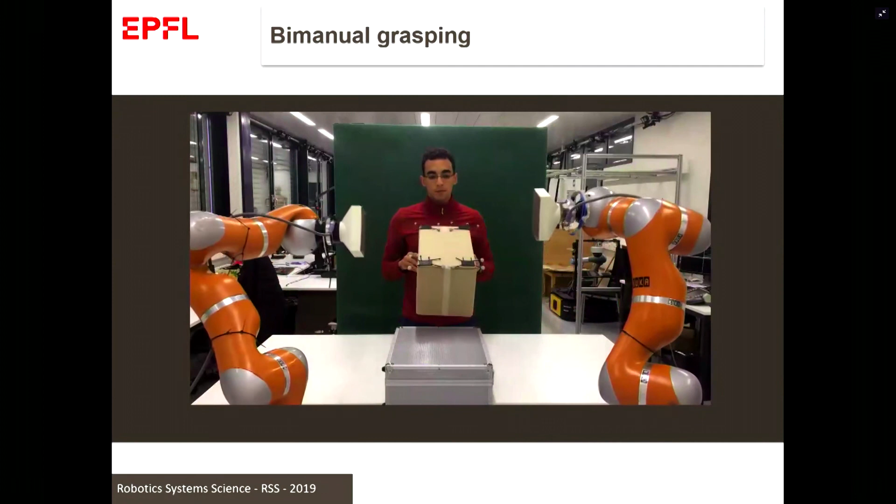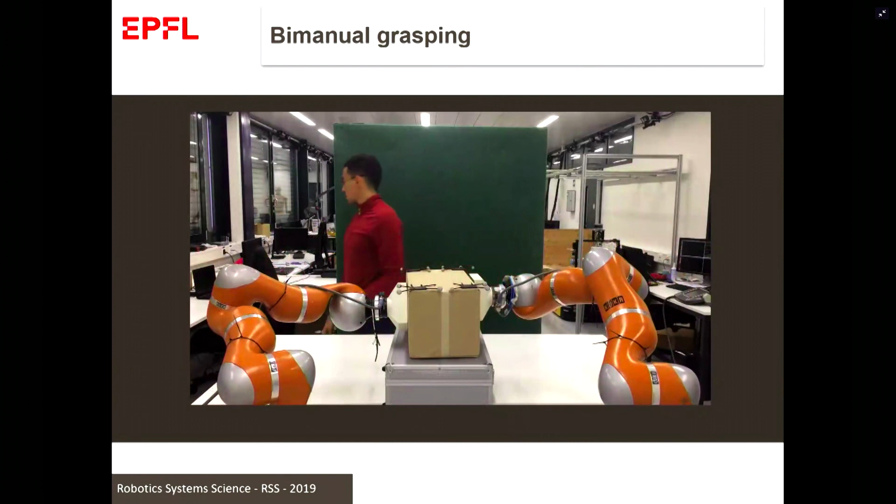That allows them to come back, as you see here, as soon as you break the grasp, to come back to the object. They can also adapt to a change in the orientation and position of the object for the same reason that we've discussed before in free motion. But now they have the additional capability to also apply forces and to rebalance the force once they are in

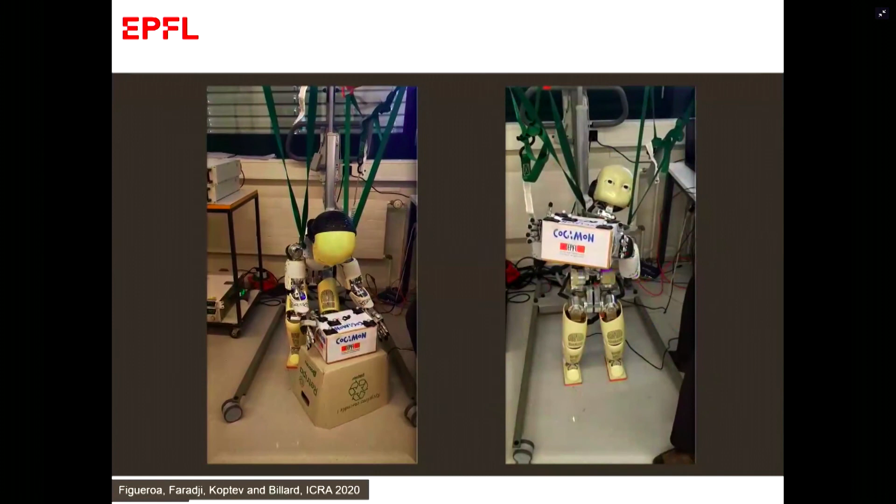contact with the object. We use this also in conjunction with a similar control system as what I described for stabilizing the center of mass, making sure that the center of mass of a humanoid robot remains within the polygon of stability while still holding the object within the hand. So now the 2 arms of the robot act as the 2 end effectors that need to synchronize and grab the object. You see here they do grab and hold the object.

On top of that, we have to control for the bending of the robot and make sure that it bends and does not fall off the polygon of stability. But you inherit from this dynamical system the ability to adjust at runtime the position of the 2 arms to still hold the object, as you see here, if you generate disturbances on both arms.

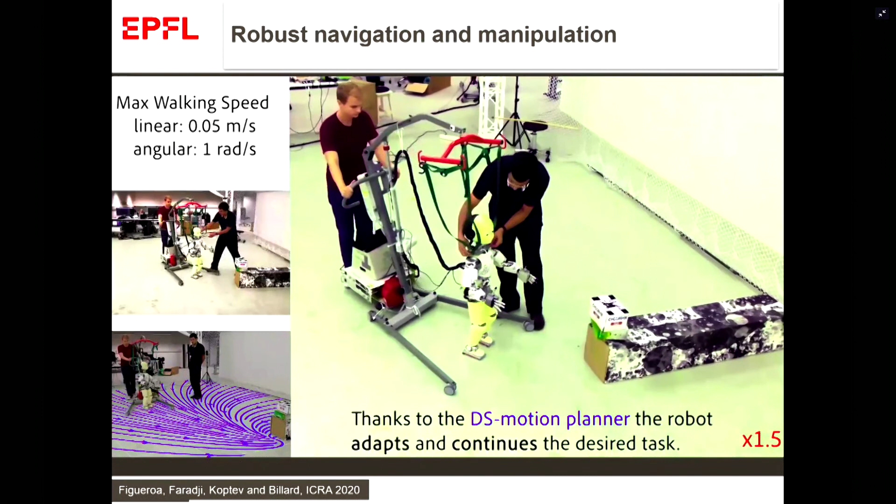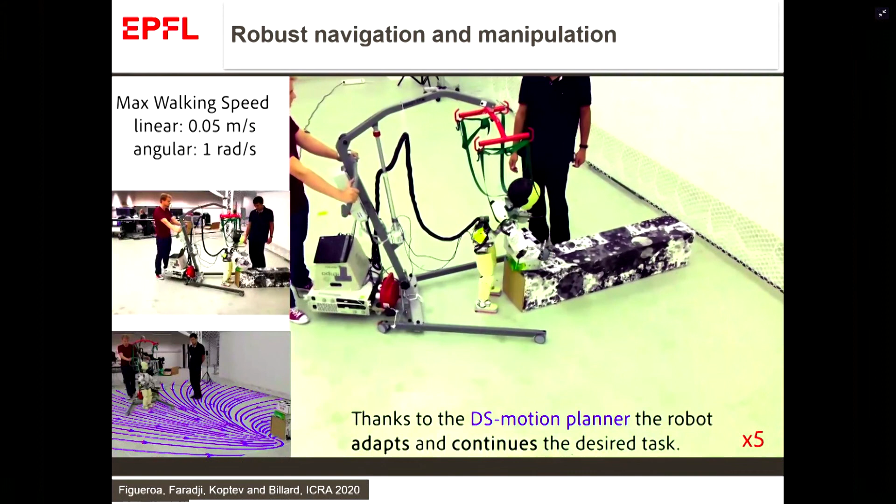This was extended by the group of people whose names are mentioned here, Nadia Figueroa, Salman Faraji, and Michael Koptev, for also allowing the robot to navigate and adapt its navigation. Observe, I draw it on the left-hand side, that we have a dynamical system for the navigation. It's a 2D system. This is the simplest one we could ever think of. So the robot has to navigate to this desired trajectory.

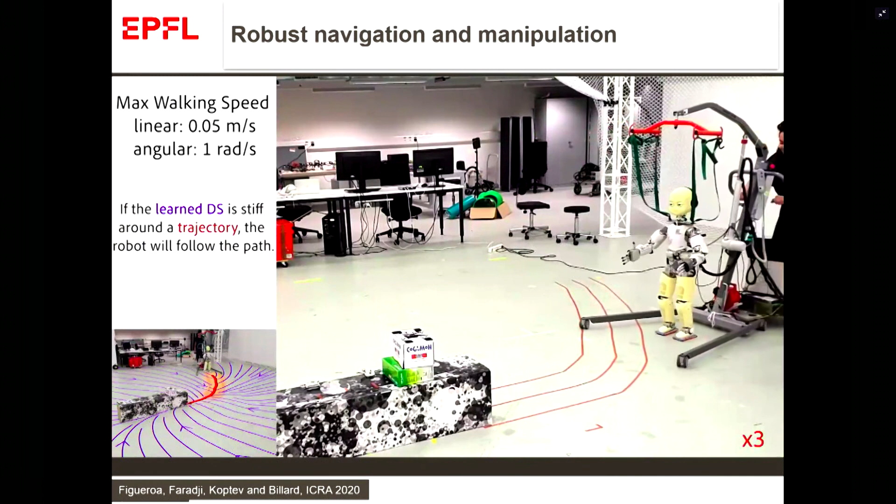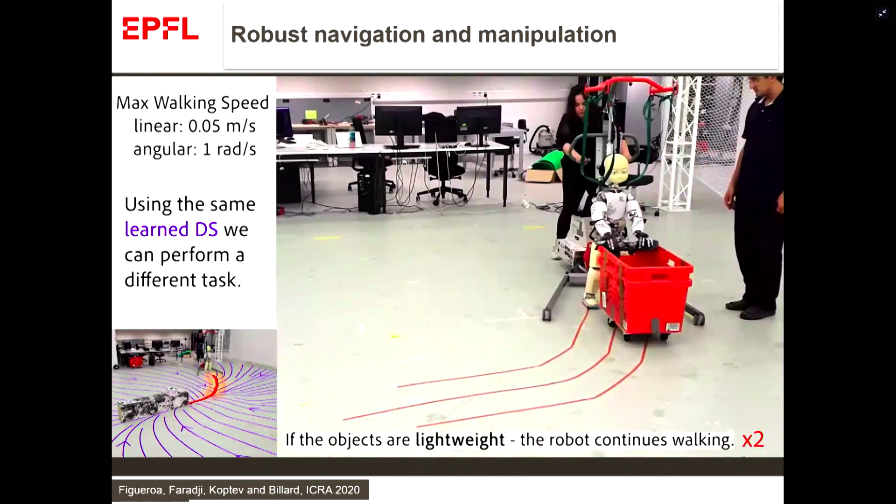It can be perturbed the same way as what we have with the dynamical system for controlling the arm. You can perturb it, move it away from the desired trajectory in navigation space, and it will come back to it. And in addition to this ability to stabilize its own motion, it has the ability to also stabilize the forces that it's applying with the two arms, such that it can continue to carry and move around different objects.

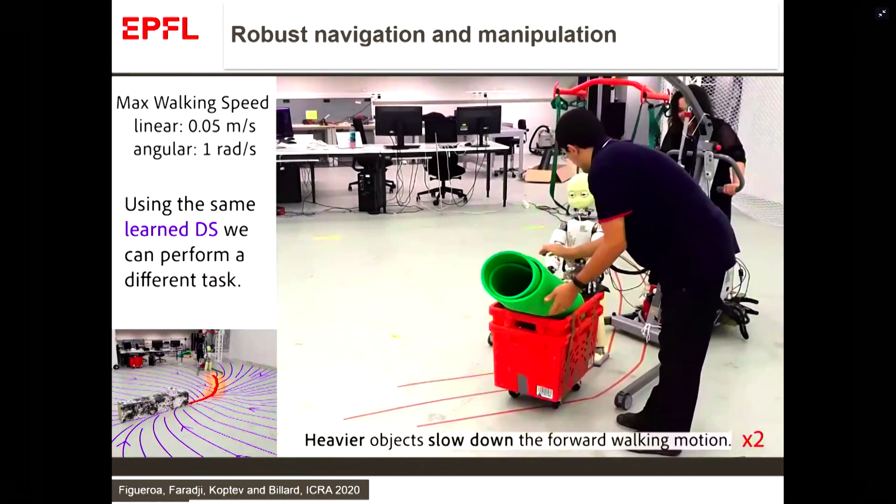This was a lot in a little time, so I wanted to very briefly give you this overview. We are now publishing a book that is supposed to be a textbook, so if people want to teach these different methods, they're all documented. We have a set of software along with the book that shows you all the different dynamical system approaches, from controlling one arm to controlling two arms to controlling in synchronization with an object, to being able to navigate in the room, and also to do force control and impedance control.